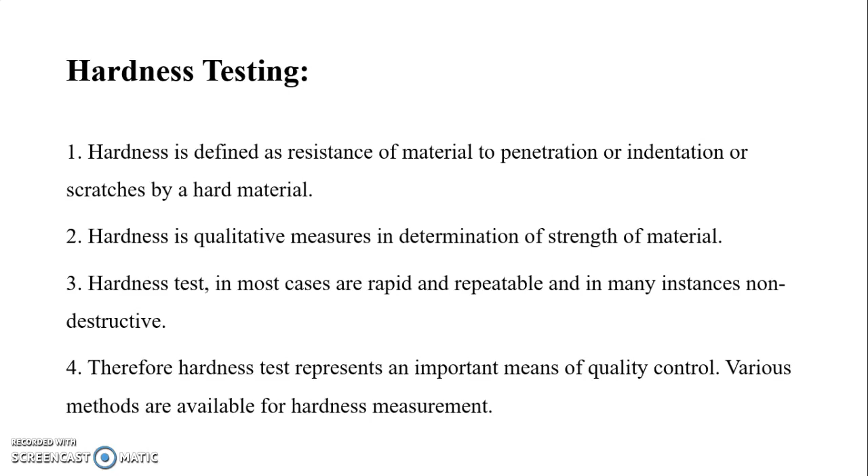Hardness tests in most cases are rapid and repeatable and in many instances non-destructive. Therefore, the hardness test represents an important means of quality control. Various methods are available for hardness measurement. In our syllabus, we have to study the Brinell hardness test as well as the Rockwell hardness test. We will see them one by one. So first, the Brinell hardness tester.

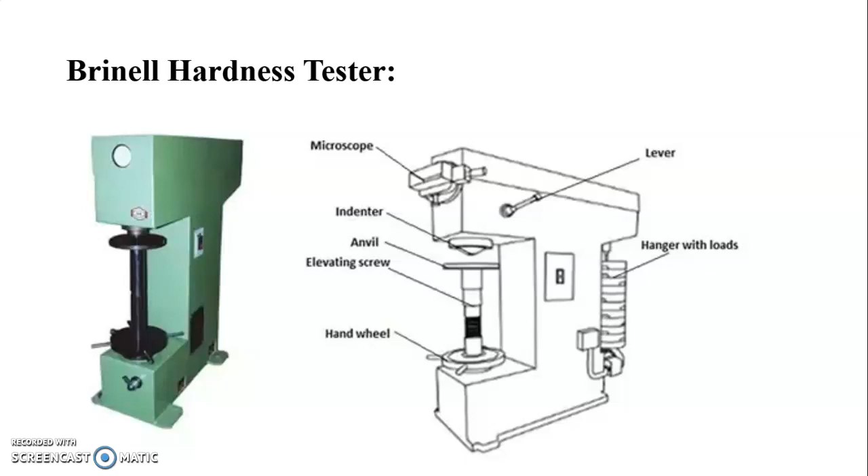For brass and soft alloys, the load used is 500 kg. The load is maintained for 10 to 30 seconds depending upon the metal being examined. The diameter of the impression made on the test piece is measured by a microscope of accuracy plus minus 0.01 mm. It is typically 2 to 6 mm. Now the hardness of the given sample can be obtained mathematically from the following relation.

BHN equals 2P divided by pi D into, in bracket, capital D minus under root of capital D square minus small d square, where BHN is the Brinell hardness number, P is the load applied in kg, capital D is the diameter of the ball in mm and small d is the diameter of indentation in mm. So this is the working principle of the Brinell hardness test.

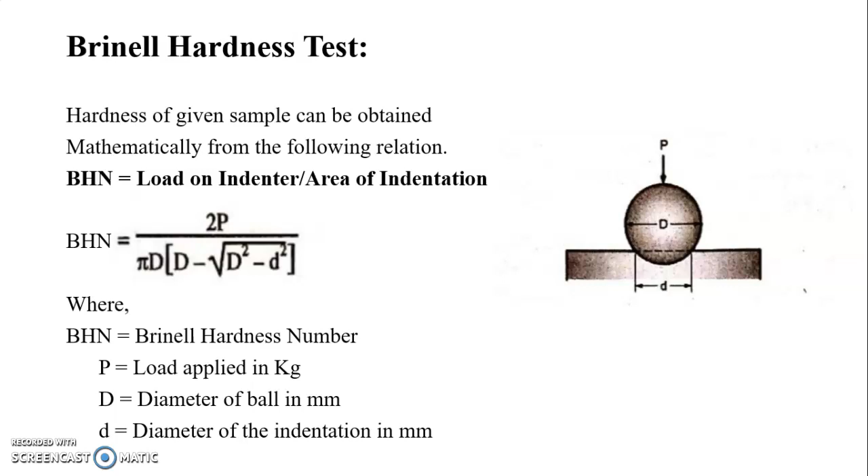So the depth of penetration is inversely proportional to the hardness. So hardness values are expressed by writing the number followed by the letters HR for hardness Rockwell and affixing the name of the scale used.

So when load is applied on a steel ball or a diamond cone indenter in two steps, that is minor load and major load one after the other, the indenter makes an impression in the test specimen. The depth of impression is measured, which gives the hardness value. The hardness can be read on the dial attached to the indenter.

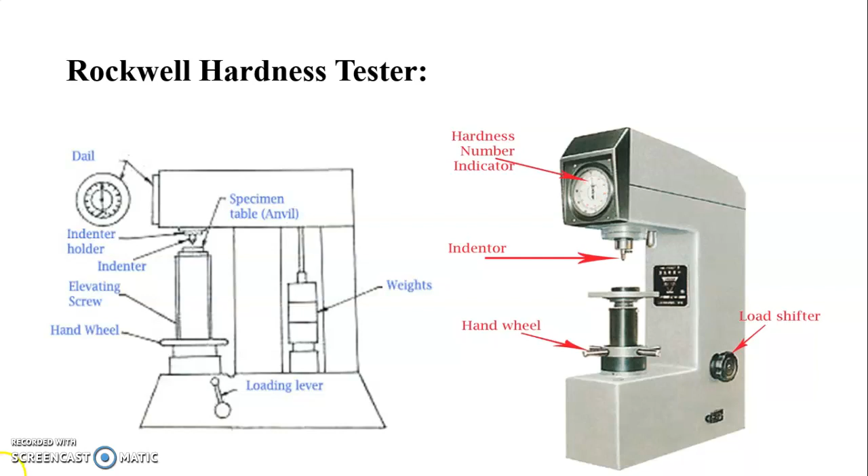So the Rockwell testing is suitable for material having hardness beyond the scope of Brinell testing. Rockwell testing is faster as compared to Brinell testing because the diameter of indentation need not be measured. The Rockwell machine gives arbitrary direct reading. Unlike Brinell testing, Rockwell testing needs no surface preparation, that is polishing of the specimen whose hardness is to be measured.

So there are two scales on Rockwell testing, that is B scale and C scale. B scale uses a steel ball indenter, whereas a diamond cone penetrator is used for measuring hardness on C scale. So B scale is for testing materials of medium hardness such as low and medium carbon steel in the annealed condition. The working range of this scale is from 0 to 100.

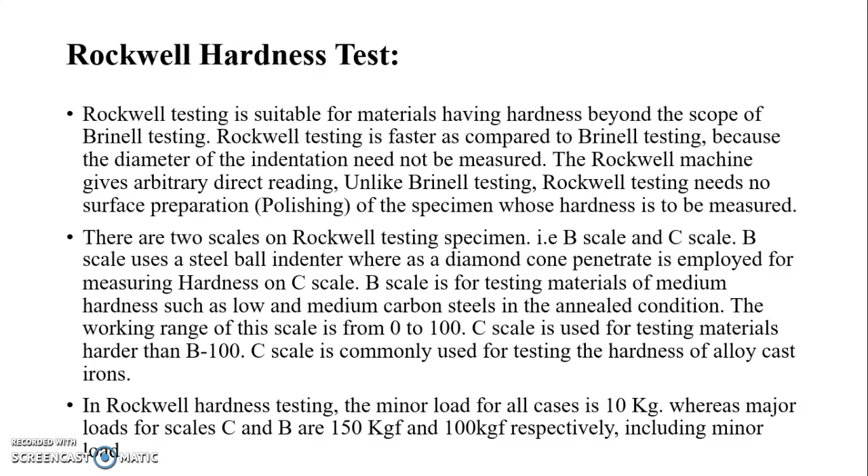C scale is used for testing materials harder than B100. C scale is commonly used for testing the hardness of alloy cast iron. In Rockwell hardness testing, the minor load for all cases is 10 kg, whereas major loads for scale C and B are 150 kgf and 100 kgf respectively, including minor load.

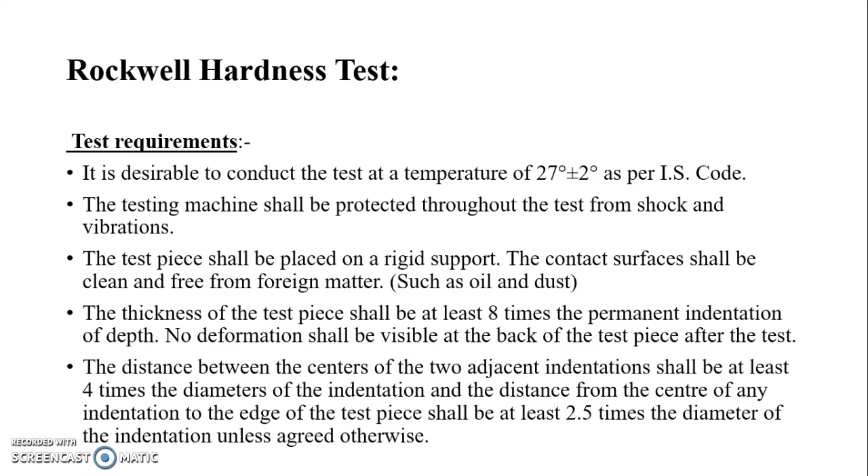The thickness of the test piece shall be at least 8 times the permanent depth of indentation. No deformation shall be visible at the back of the test piece after the test. And next, the distance between the centers of the two adjacent indentations shall be at least 4 times the diameter of the indentation, and the distance from the center of any indentation to the edge of the test piece shall be at least 2.5 times the diameter of the indentation unless agreed otherwise.

Then next, there is a procedure. Place the test specimen upon the machine anvil. The dial may show any reading. Handwheel is turned, thereby raising the test piece up against the steel ball indenter till the needle of the small dial is against the red mark. This applies minor load, that is 10 kgf.

Select required major load depending on test specimen by using load selecting lever and apply by pressing the crank provided on the right hand side of the machine. Time is given as 30 seconds so as to make the load reach the specimen fully.

When the penetration is completed, the crank is turned in the reverse direction, thereby withdrawing the minor load but leaving the major load applied. The pointer moves further and becomes standstill. This reading is taken as Rockwell hardness number, that is B scale, C scale or F scale. Rotate the hand wheel and test piece is lowered, or we can say removed.

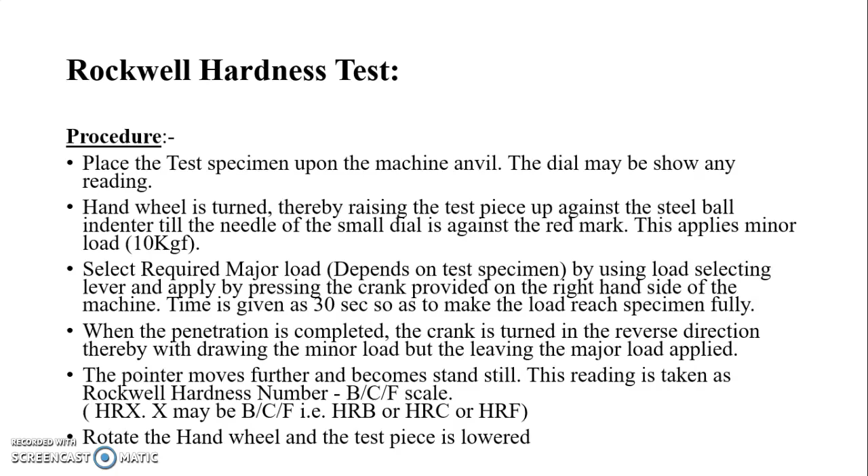Then we have to take some precautions during the testing on the Rockwell hardness tester. So successive impressions should not be superimposed on another nor be made too close together when making hardness determination. No reading should be made too close to the edge, and specimen should not be so thin that the impression comes through the other side. Small irregularities, dirt and scale should be avoided because of the great sensitivity of the Rockwell test.